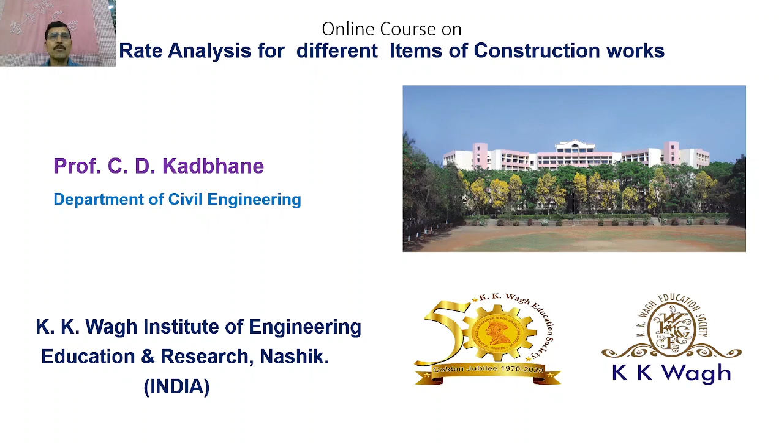Dear students, friends, we are going to learn the basic fundamental concepts of rate analysis for different items of construction work. Basically, whenever civil engineering professionals have to work in the field, they have to carry out rate analysis for the preparation of schedule of rates, also called district schedule rates, or sometimes for the state, state schedule rates.

So there are different items of construction activities in different types of construction. For example, in case of RCC residential buildings, there may be different items such as excavation, plain cement concrete, then RCC in footings, column, slab, beams, lintels. Similarly, there are items such as superstructure brickwork, plinth level brickwork, internal plastering, external plastering to the brickwork, laying the tiles, internal painting and external painting of a house. So these are different types of items of the work.

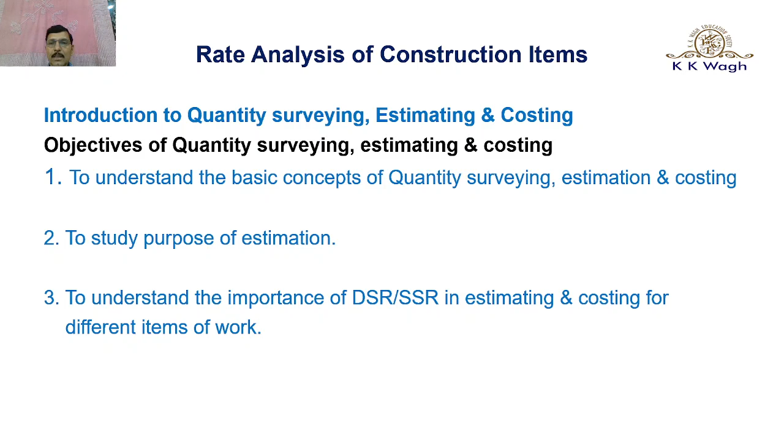Now, before studying the rate analysis of construction items, it is imperative to study the different concepts related to quantity surveying, estimating, and costing. So let us learn first the objectives. Number one, the basic objective is to understand the basic concepts of quantity surveying, estimation, and costing. Second objective is to study the purpose of estimation. Next objective is to understand the importance of district schedule rates or state schedule rates in estimating and costing for different items of work.

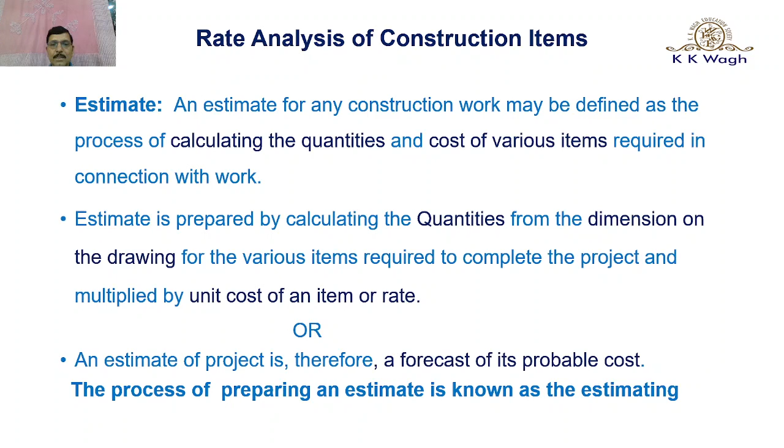Now let us learn what is meant by estimate. An estimate for any construction work may be defined as the process of calculating the quantities and costs of various items required in connection with the work. An estimate is prepared by calculating the quantities from the dimensions on the drawing for the various items required to complete the project, multiplied by the unit cost of an item or rates. An estimate of a project is therefore a forecast of its probable cost. So the process of preparing an estimate is known as estimating.

Now let us have an introduction regarding estimating and costing in construction. What do you mean by costing? The process of calculating the cost of work before its execution is called costing. What is meant by quantity survey? It is a schedule or list of quantities of all possible items required for construction of any structure. Thus, quantity survey indicates the amount of work to be done under each item.

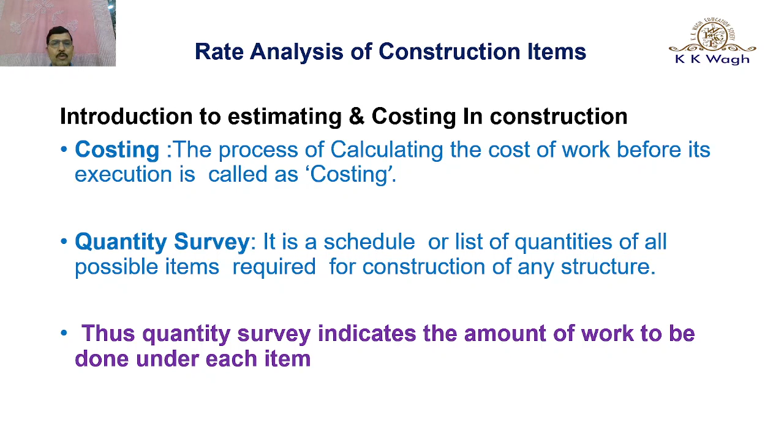Now let us learn the purpose of estimating and costing. Estimating and costing is carried out by civil engineering professionals directly related to the construction activity. The first purpose is to know the approximate cost of proposed work. Next is to obtain administrative approval and technical sanction. Number three is to know the requirement of tools, plants, and equipment before the construction activity starts.

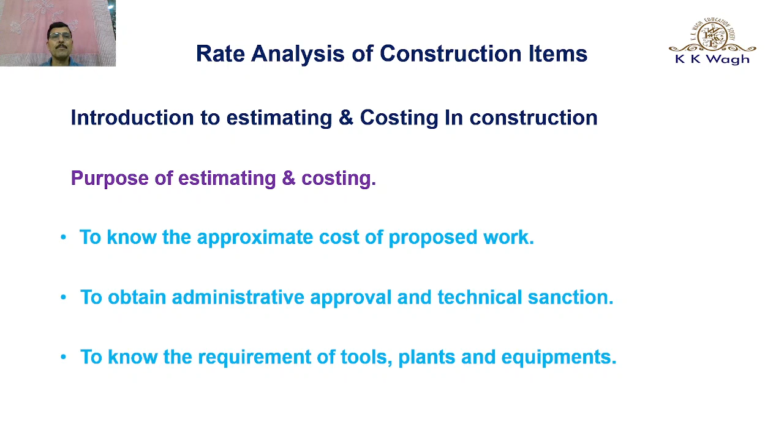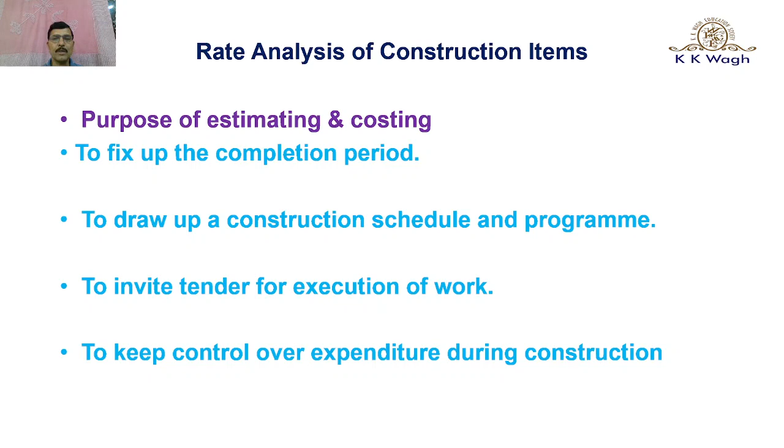Next purpose is to fix up the completion period. With the help of estimating and costing, we will know the probable completion period of the particular construction work. Next purpose is to draw up a construction schedule and program, which can be planned before commencement of any construction activity. Next purpose is to invite tenders for execution of work, and to keep control over expenditure during construction.

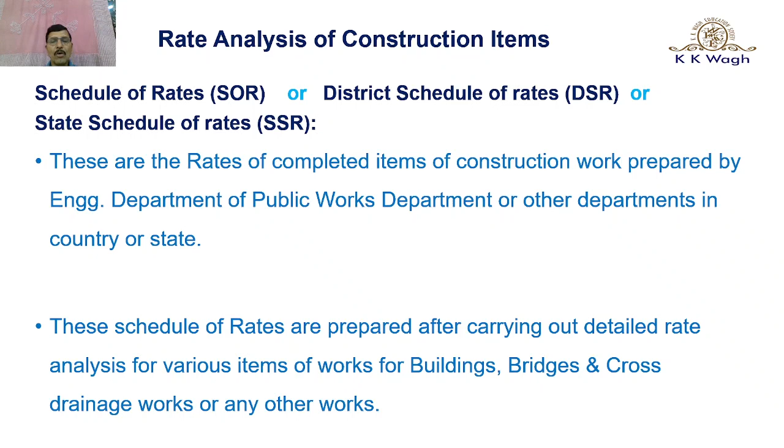Now, what is meant by schedule of rates, called SOR? If the schedule of rates are prepared for a district, they are called DSR, and if the same rates are prepared for a state, they are referred to as state schedule of rates. These are the rates of completed items of construction work prepared by the engineering department of the public works department or other departments in the country or a state. They are prepared after carrying out detailed rate analysis for various items of works for buildings, bridges, cross drainage works or any other type of construction work.

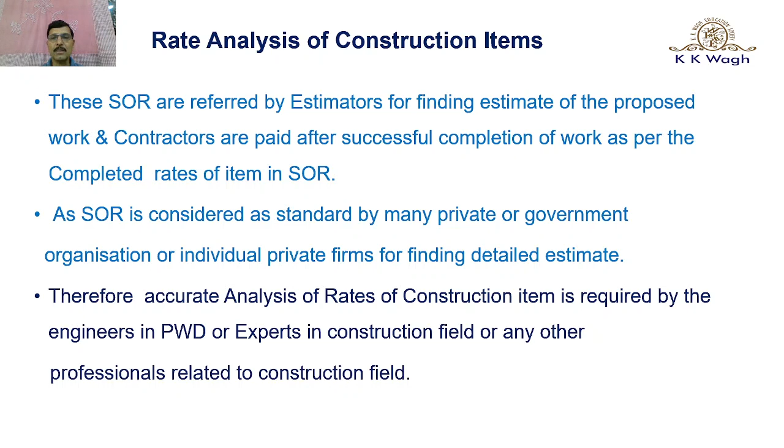Therefore, schedule of rates are prepared after doing the rate analysis of different items of work. So rate analysis of construction items is a very important activity before preparing schedule of rates. Therefore, accurate analysis of rates of construction items is required by engineers in the public works department, experts in the construction field, or any other professionals related to the construction field.

So for preparation of rate analysis as well as for preparation of estimation and costing, various data is required. The data required for rate analysis as well as estimating and costing is as follows. Number one is submission drawing and detailed working drawings.

Next is list of items of work, mode of measurement and units of measurement, deductions and deduction rules for openings, description of items of work, design details of various RCC building components, schedule of rates or DSR or SSR, rate analysis for special items if they are not included in schedule of rates, district schedule rates or state schedule rates.

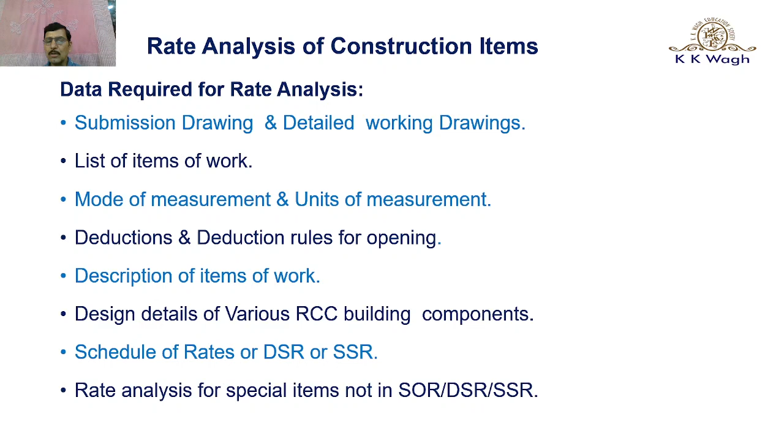So the preparation of a detailed estimate will require some formats or sheets. So let us learn first what is a measurement sheet. In the measurement sheet, whenever all detailed drawings and working drawings are available with us, for example, plan, elevation, section, and working drawings of different items if required.

If they are available with us, with the help of these drawings and specification, we can write down serial number of item, then a brief description of the item is written in the second column, then if similar items are available, their numbers are written, then the length, breadth and height are entered directly from the working drawings for that particular item. Then quantity is calculated, which is a multiplication of length, breadth, height, and then total quantities are written.

And if there are special remarks regarding different methods of taking out quantities, if they are to be mentioned, they are mentioned in the remarks. So special remarks are written in the remarks column.

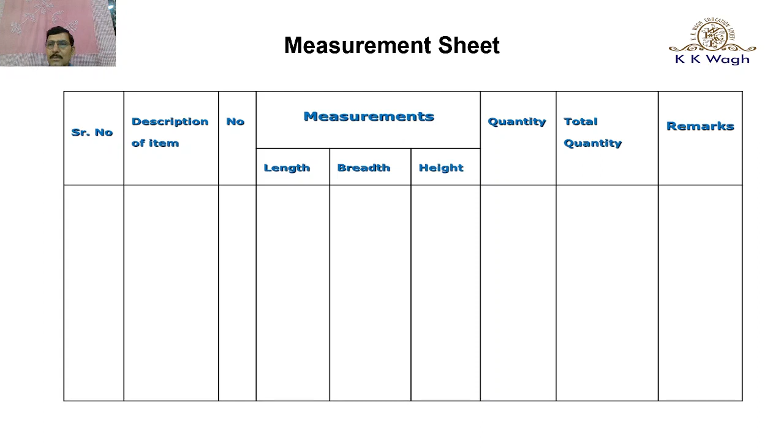Then whatever quantity we have found out in the measurement sheet is transferred to this abstract sheet, and the rate of the particular excavation is taken from the state schedule of rates or district schedule of rates. Depending on lead and lift of a particular activity, the rate from the existing or current DSR or SSR is selected. After that, quantity of excavation and its rate are multiplied so that we get a cost, and that cost is written in the cost column. And if there are any remarks, they should be written in the last column.

In a similar way, all the items from the measurement sheet are copied, descriptions are copied, units of different items will vary, and their quantities are entered from the measurement sheet, and respective rates are copied from DSR and SSR, and quantity of each item and its respective rate are multiplied so that we get the cost of each individual item, and all these costs are added at the end, and all additional costs are added to the total cost so that we get a detailed estimate of a proposed structure.

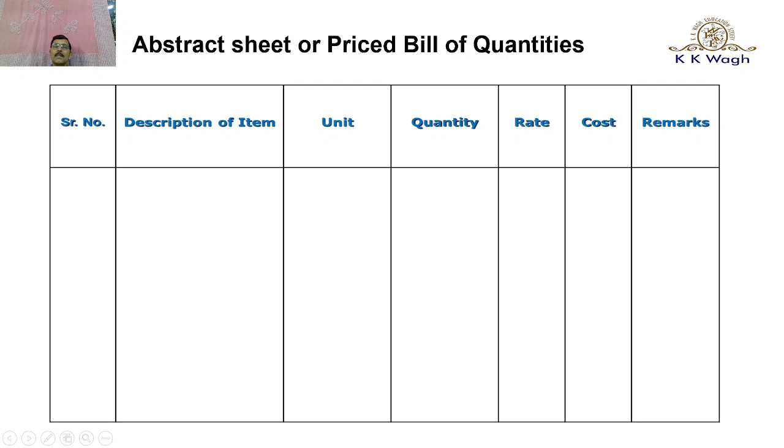So that is about the introduction to the rate analysis of different items of works.